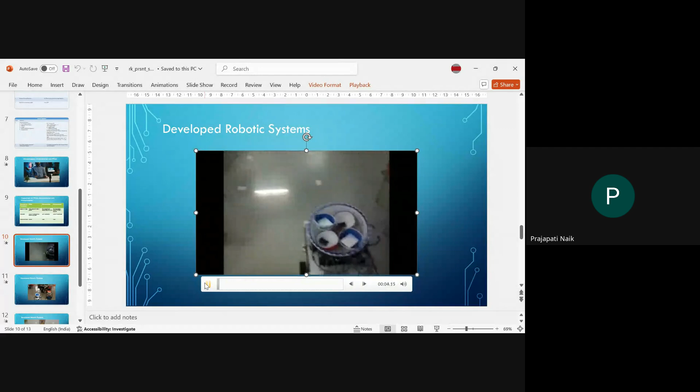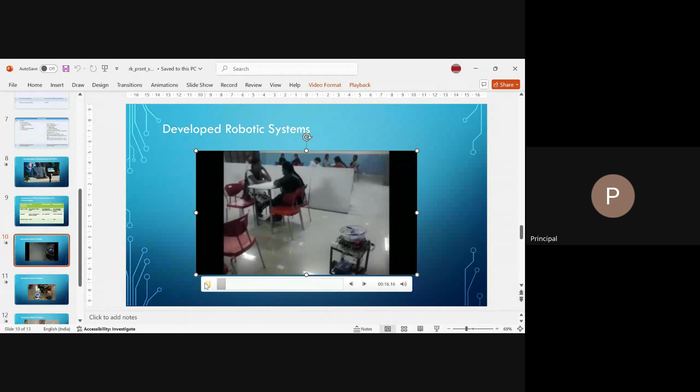We actually developed 2 robotic systems, as I mentioned previously. This is the robotic system, single robo, in this environment. This entire environment we created at our lab space by removing all the lab tables, work tables, and so on. It was very hard work carried out by my first PhD student. See how this is moving successfully from one room, from one cubicle to another cubicle.

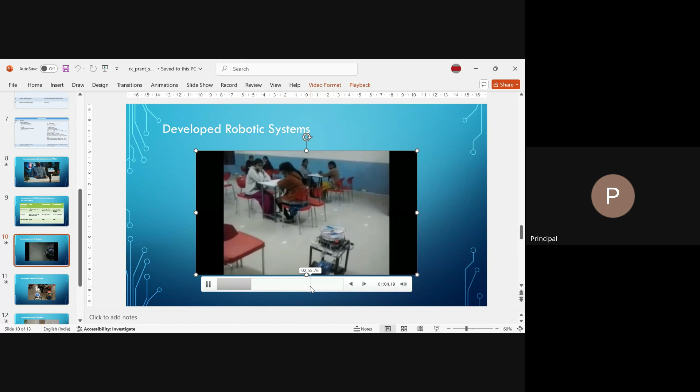I will show another interesting thing. Here we are having 2 robotic systems - see how they are moving. This robotic system is controlled and guided by FPGA only, by means of sensor data. We used minimal sensing, sir - we have not used any camera here. For localization, we used RFIDs.

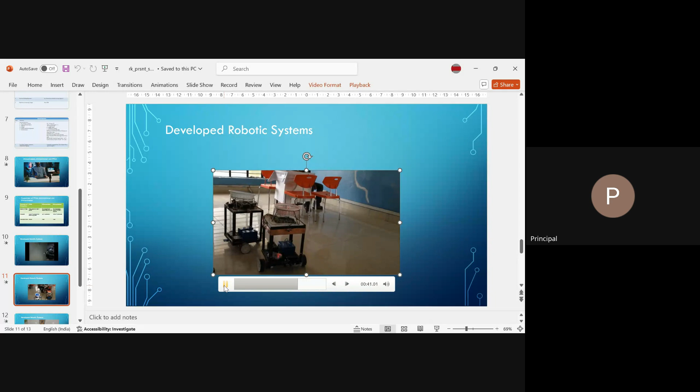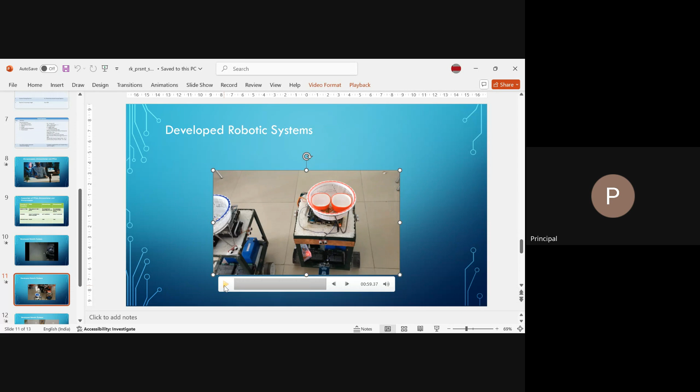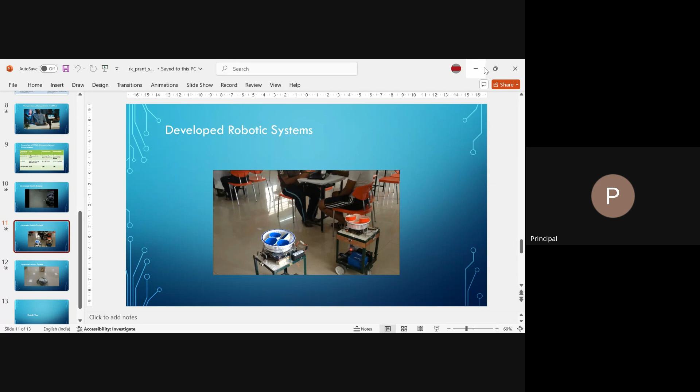And these 2 robots won't touch each other. To identify whether the other robo is coming in front of the first robo or not, we attached RFID as the information provider. Each robo has one particular RFID. By sensing that RFID, the robo will know whether the other robo is there or not. So these algorithms got implemented, and I would like to show one more video clip related to this particular robotic system.

One more thing, similar thing I think - this is also the same. See clearly.

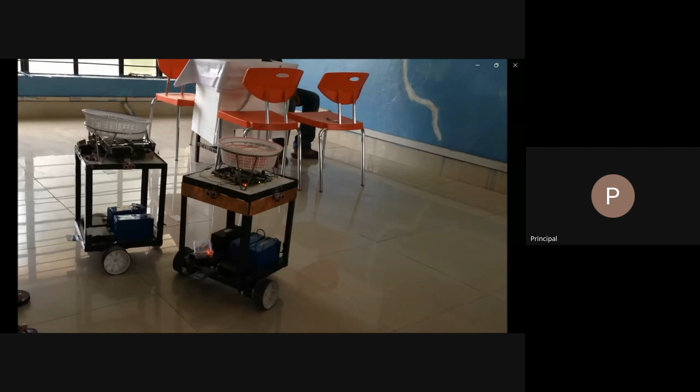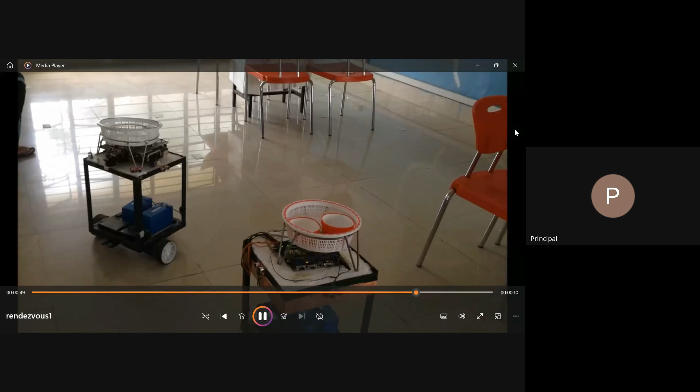Next, coming to the next research work related to robotic system development. So I received an RPS grant, and using that, we developed a person follower robotic system.

For this purpose, we have used the NI myRIO robotic platform. It is to verify when an old age person is making small exercise or making rounds in a room, whether his status is good or he is in a falling state - whether a person is about to fall or not, when the old age person is moving or walking at a particular location. For that purpose, we developed this particular person follower robotic system.

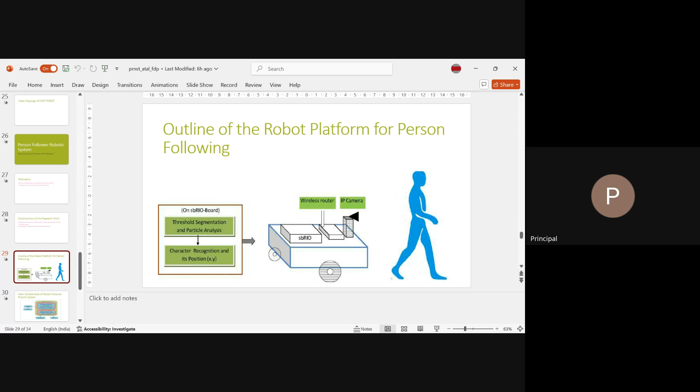This is the sbRIO platform's inside structure. It has a Spartan 3 FPGA and a PowerPC processor.

So here the robotic system moves forward, left, right, and that is going to use the neuro fuzzy logic based algorithm for controlling the movement of wheels. Related to this, I would like to show one video clip for showcasing its working.

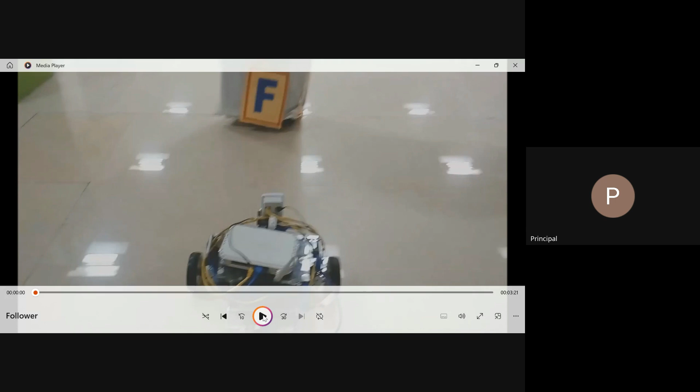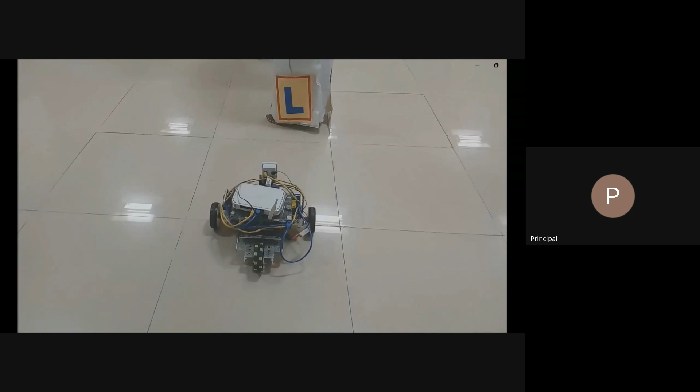See, this is the robotic system we developed and conducted experiment in our lab. If F letter is appearing, by recognizing the F character, the robotic system will move forward. When L appears, it will move leftward direction. So it will continuously follow the person. Left, forward, right, in those directions, the robot will follow the person.

If person is about to fall, then it will inform the person who is supervisor for this particular old age people. So in this way, this robotic system works.

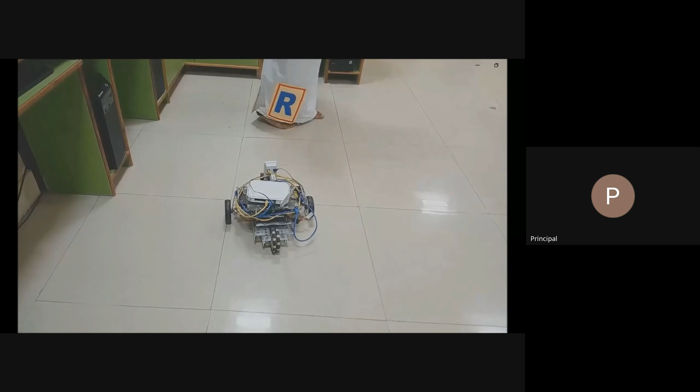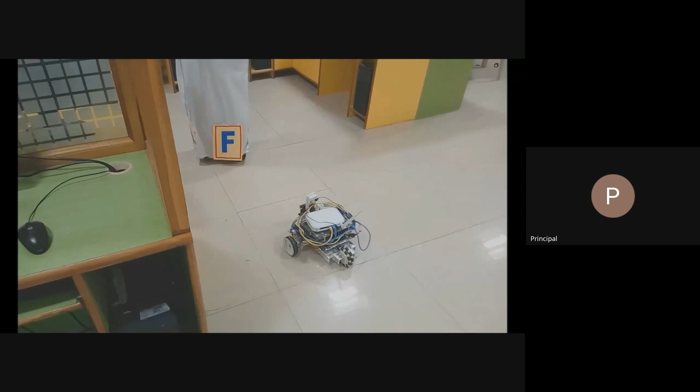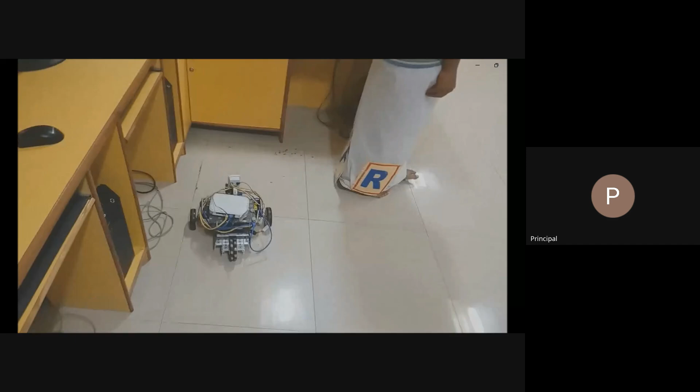So the main intention is in hospital, after having bypass surgery or angiography, patients requested to move in a particular place. At that time, with a single person at remote to see whether each one is moving properly or about to fall, to detect that one, this particular robotic system was developed. That is the intention of developing this particular robotic system.

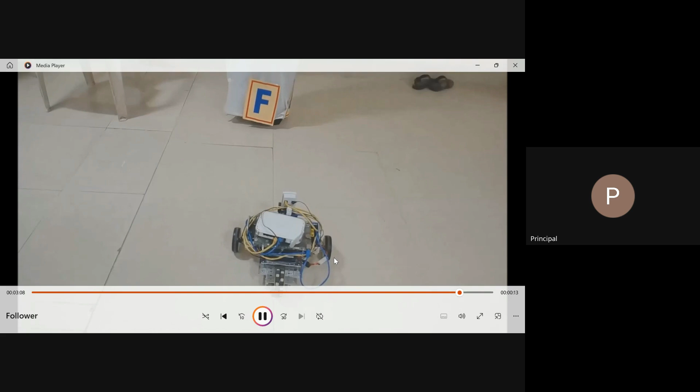So these are all the different robotic systems that have been developed over the time. At this point, I would like to take questions from the participants, please.

Hello? Any question? Yes, sir. One question is there.

Yes, please. Actually, I want to know what is the cost required, price investment, for developing that robot, the canteen robot.

Canteen robot, around 25,000 we spent, sir, for platform development. Then through grants, we purchased FPGA board, other sensors, so on. We fitted. So totally with 50,000 rupees cost, we can develop the prototype. But when you go for mass production, further cost reduction can be achieved, and also we can augment that particular design with camera, and also using convolution.